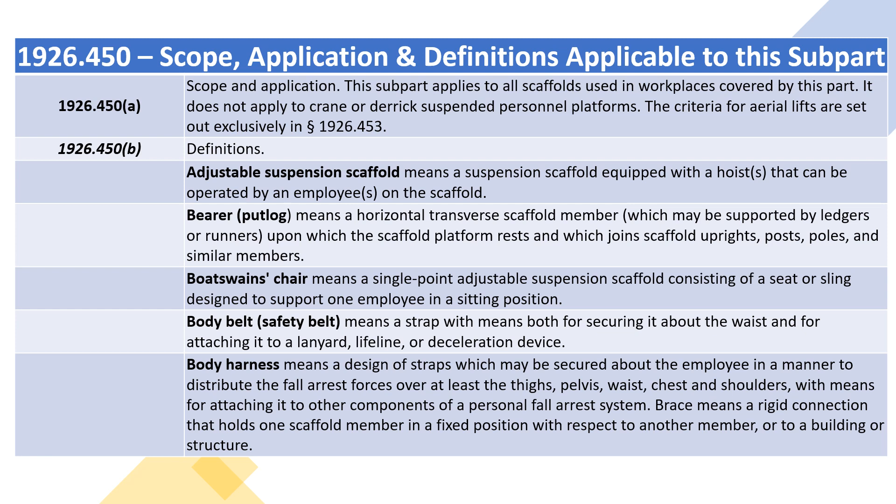Brace means a rigid connection that holds one scaffold member in a fixed position with respect to another member, or to a building or structure.

Bricklayer's square scaffold means a supported scaffold composed of framed squares which support a platform. Carpenter's bracket scaffold means a supported scaffold consisting of a platform supported by brackets attached to building or structural walls.

Catenary scaffold means a suspension scaffold consisting of a platform supported by two essentially horizontal and parallel ropes attached to structural members of a building or other structure. Additional support may be provided by vertical pickups.

Chimney hoist means a multi-point adjustable suspension scaffold used to provide access to work inside chimneys. See multi-point adjustable suspension scaffold.

Cleat means a structural block used at the end of a platform to prevent the platform from slipping off its supports. Cleats are also used to provide footing on sloped surfaces such as crawling boards.

Competent person means one who is capable of identifying existing and predictable hazards in the surroundings or working conditions which are unsanitary, hazardous, or dangerous to employees, and who has authorization to take prompt corrective measures to eliminate them.

Continuous run scaffold means a two-point or multi-point adjustable suspension scaffold constructed using a series of interconnected braced scaffold members or supporting structures erected to form a continuous scaffold.

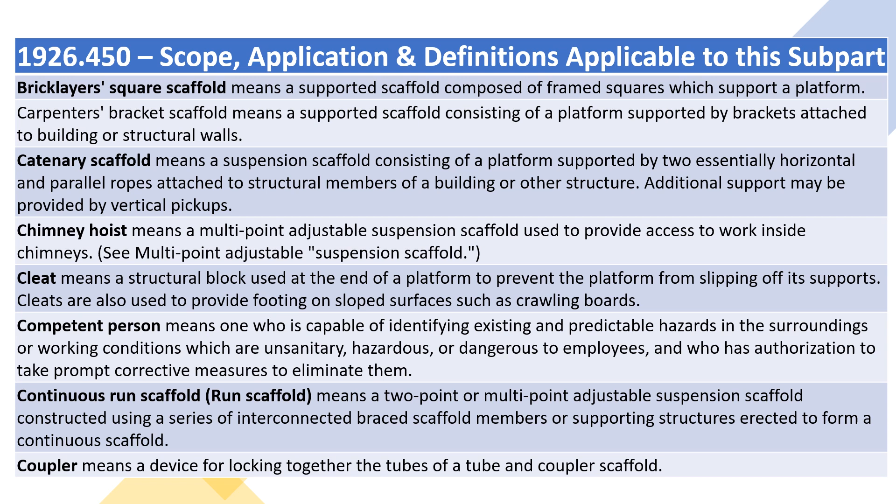Coupler means a device for locking together the tubes of a tube and coupler scaffold. Crawling board, or chicken ladder, means a supported scaffold consisting of a plank with cleats spaced and secured to provide footing, for use on sloped surfaces such as roofs.

Deceleration device means any mechanism, such as a rope grab, ripstitch lanyard, specially woven lanyard, tearing or deforming lanyard, or automatic self-retracting lifeline lanyard, which dissipates a substantial amount of energy during a fall arrest or limits the energy imposed on an employee during fall arrest.

Double pole, or independent pole, scaffold means a supported scaffold consisting of platforms resting on crossbeams, bearers, supported by ledgers and a double row of uprights independent of support, except ties, guys, braces, from any structure.

Equivalent means alternative designs, materials or methods to protect against a hazard which the employer can demonstrate will provide an equal or greater degree of safety for employees than the methods, materials or designs specified in the standard.

Exposed power lines means electrical power lines which are accessible to employees and which are not shielded from contact. Such lines do not include extension cords or power tool cords.

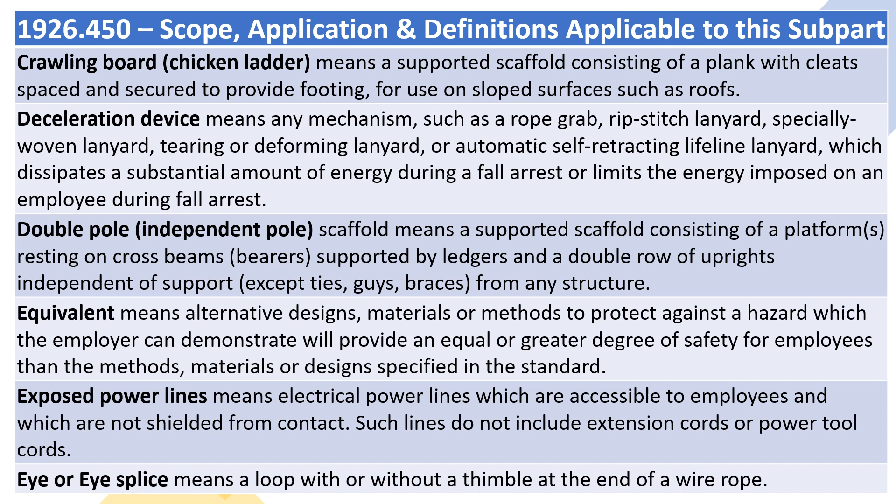Eye splice means a loop with or without a thimble at the end of a wire rope. Fabricated decking and planking means manufactured platforms made of wood, including laminated wood, and solid sawn wood planks, metal or other materials.

Fabricated frame scaffold, or tubular welded frame scaffold, means a scaffold consisting of a platform supported on fabricated end frames with integral posts, horizontal bearers, and intermediate members.

Failure means load refusal, breakage, or separation of component parts. Load refusal is the point where the ultimate strength is exceeded.

Float, or ship, scaffold means a suspension scaffold consisting of a braced platform resting on two parallel bearers and hung from overhead supports by ropes of fixed length.

Form scaffold means a supported scaffold consisting of a platform supported by brackets attached to formwork. Guardrail system means a vertical barrier consisting of, but not limited to, top rails, mid rails, and posts erected to prevent employees from falling off a scaffold platform or walkway to lower levels.

Hoist means a manual or power-operated mechanical device to raise or lower a suspended scaffold. Horse scaffold means a supported scaffold consisting of a platform supported by construction horses, saw horses. Horse scaffolds constructed of metal are sometimes known as trestle scaffolds.

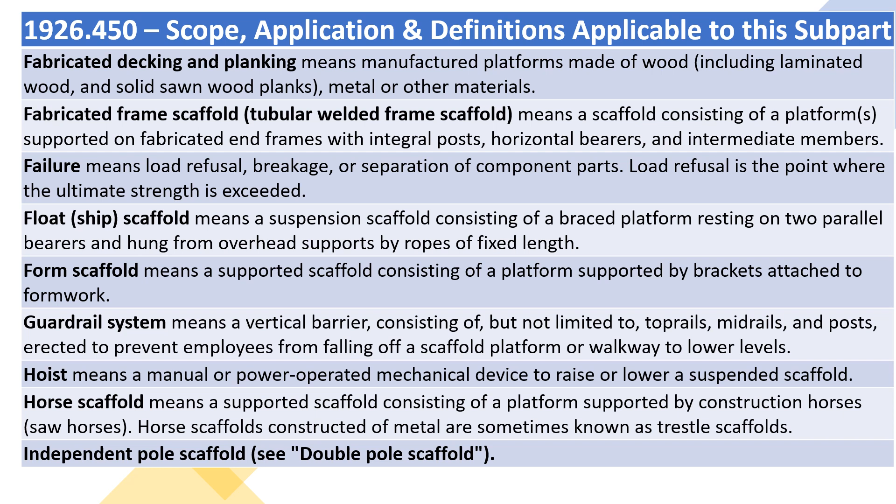Independent pole scaffold, see double pole scaffold. Interior hung scaffold means a suspension scaffold consisting of a platform suspended from the ceiling or roof structure by fixed length supports. Ladder jack scaffold means a supported scaffold consisting of a platform resting on brackets attached to ladders.

Ladder stand means a mobile, fixed-size, self-supporting ladder consisting of a wide flat tread ladder in the form of stairs. Landing means a platform at the end of a flight of stairs.

Large area scaffold means a pole scaffold, tube and coupler scaffold, systems scaffold, or fabricated frame scaffold erected over substantially the entire work area. For example, a scaffold erected over the entire floor area of a room.

Lean-to scaffold means a supported scaffold which is kept erect by tilting it toward and resting it against a building or structure. Lifeline means a component consisting of a flexible line that connects to an anchorage at one end to

hang vertically, vertical lifeline, or that connects to anchorages at both ends to stretch horizontally, horizontal lifeline, and which serves as a means for connecting other components of a personal fall arrest system to the anchorage.

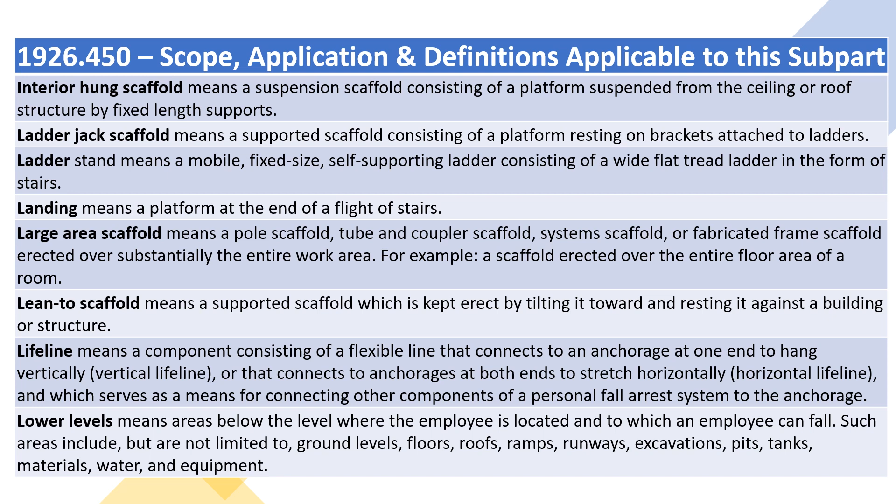Lower levels means areas below the level where the employee is located and to which an employee can fall. Such areas include, but are not limited to, ground levels, floors, roofs, ramps, runways, excavations, pits, tanks, materials, water, and equipment. Mason's adjustable supported scaffold, see self-contained adjustable scaffold.

Mason's multi-point adjustable suspension scaffold means a continuous run suspension scaffold designed and used for masonry operations. Maximum intended load means the total load of all persons, equipment, tools, materials, transmitted loads, and other loads reasonably anticipated to be applied to a scaffold or scaffold component at any one time.

Mobile scaffold means a powered or unpowered, portable, caster or wheel-mounted supported scaffold. Multi-level suspended scaffold means a two-point or multi-point adjustable suspension scaffold with a series of platforms at various levels resting

on common stirrups. Multi-point adjustable suspension scaffold means a suspension scaffold consisting of a platforms which is suspended by more than two ropes from overhead supports and equipped with means to raise and lower the platform to desired work levels. Such scaffolds include chimney hoists.

Needle beam scaffold means a platform suspended from needle beams. Open sides and ends means the edges of a platform that are more than 14 inches, 36 centimeters away horizontally from a sturdy, continuous, vertical surface, such as a building wall, or a sturdy, continuous horizontal surface, such as a floor, or a point of access.

Exception: for plastering and lathing operations, the horizontal threshold distance is 18 inches, 46 centimeters. Outrigger means the structural member of a supported scaffold used to increase the base width of a scaffold in order to provide support for and increased stability of the scaffold.

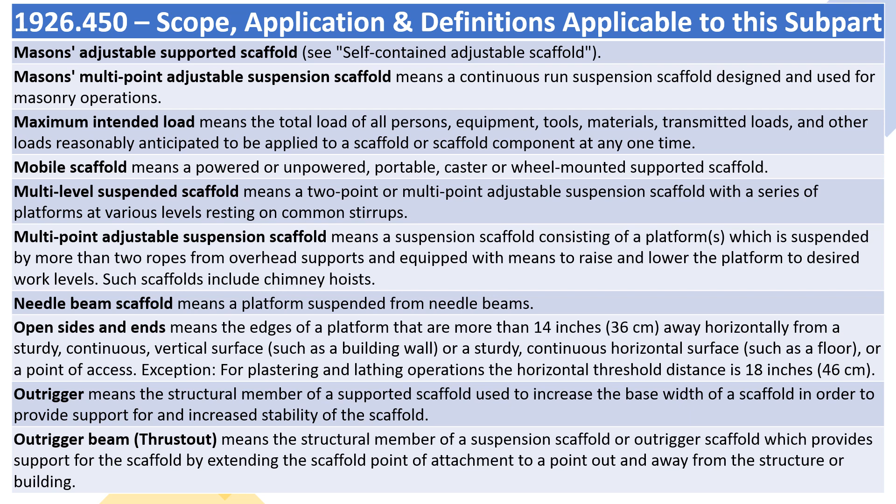Outrigger beam, thrust out, means the structural member of a suspension scaffold or outrigger scaffold which provides support for the scaffold by extending the scaffold point of attachment to a point out and away from the structure or building.

Outrigger scaffold means a supported scaffold consisting of a platform resting on outrigger beams, thrust-outs, projecting beyond the wall or face of the building or structure, the inboard ends of which are secured inside the building or structure.

Overhand bricklaying means the process of laying bricks and masonry units such that the surface of the wall to be jointed is on the opposite side of the wall from the mason, requiring the mason to lean over the wall to complete the work. It includes mason tending and electrical installation incorporated into the brick wall during the overhand bricklaying process.

Personal fall arrest system means a system used to arrest an employee's fall. It consists of an anchorage, connectors, a body belt or body harness and may include a lanyard, deceleration device, lifeline, or combinations of these. Platform means a work surface elevated above lower levels.

Platforms can be constructed using individual wood planks, fabricated decks, and fabricated platforms.

Pole scaffold: see definitions for single pole scaffold and double, independent, pole scaffold. Power-operated hoist means a hoist which is powered by other than human energy. Pump jack scaffold means a supported scaffold consisting of a platform supported by vertical poles and movable support brackets.

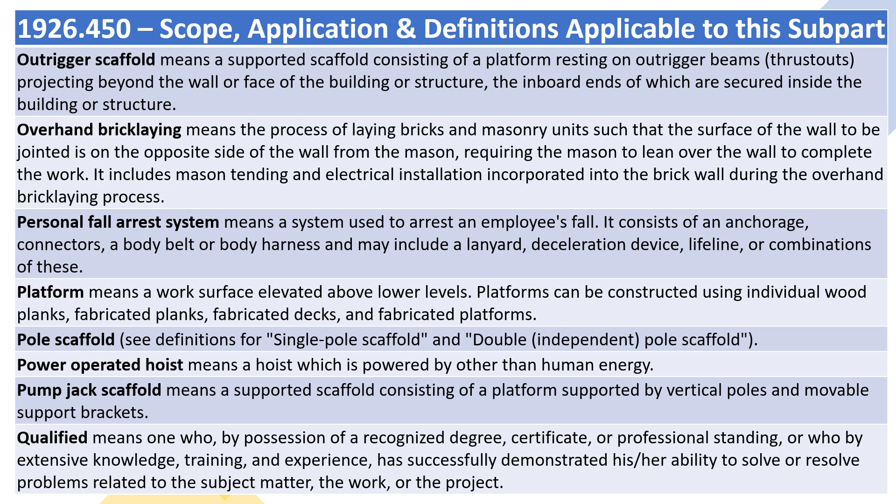Qualified means one who, by possession of a recognized degree, certificate, or professional standing, or who by extensive knowledge, training, and experience, has successfully demonstrated his or her ability to solve or resolve problems related to the subject matter, the work, or the project. Rated load means the manufacturer's specified maximum load to be lifted by a hoist or to be applied to a scaffold or scaffold component.

Repair bracket scaffold means a supported scaffold consisting of a platform supported by brackets which are secured in place around the circumference or perimeter of a chimney, stack, tank, or other supporting structure by one or more wire ropes placed around the supporting structure. Roof bracket scaffold means a rooftop supported scaffold consisting of a platform resting on angular-shaped supports.

Runner, ledger, or ribbon means the lengthwise horizontal spacing or bracing member which may support the bearers. Scaffold means any temporary elevated platform, supported or suspended, and its supporting structure, including points of anchorage, used for supporting employees or materials or both.

Self-contained adjustable scaffold means a combination supported and suspension scaffold consisting of an adjustable platform mounted on an independent supporting frame not a part of the object being worked on, and which is equipped with a means to permit the raising and lowering of the platforms. Such systems include rolling roof rigs, rolling outrigger systems, and some masons' adjustable supported scaffolds.

Shore scaffold means a supported scaffold which is placed against a building or structure and held in place with props. Single-point adjustable suspension scaffold means a suspension scaffold consisting of a platform suspended by one rope from an overhead support and equipped with means to permit the movement of the platform to desired work levels.

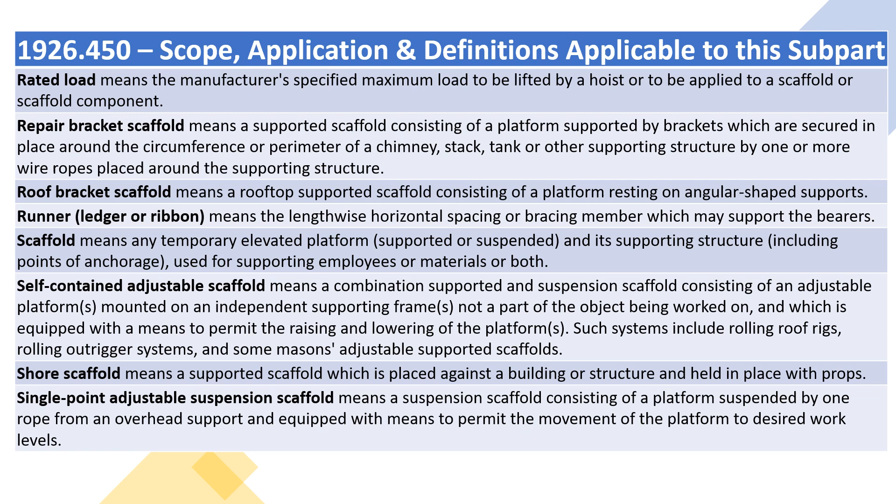Single-pole scaffold means a supported scaffold consisting of a platform resting on bearers, the outside ends of which are supported on runners secured to a single row of posts or uprights, and the inner ends of which are supported on or in a structure or building wall.

Stair tower, scaffold stairway/tower, means a tower comprised of scaffold components and which contains internal stairway units and rest platforms. These towers are used to provide access to scaffold platforms and other elevated points such as floors and roofs. Stall load means the load at which the prime mover of a power-operated hoist stalls or the power to the prime mover is automatically disconnected.

Step, platform, and trestle ladder scaffold means a platform resting directly on the rungs of step ladders or trestle ladders. Stilts means a pair of poles or similar supports with raised footrests, used to permit walking above the ground or working surface. Stonesetter's multi-point adjustable suspension scaffold means a continuous run suspension scaffold designed and used for stonesetter's operations.

Supported scaffold means one or more platforms supported by outrigger beams, brackets, poles, legs, uprights, posts, frames, or similar rigid support. Suspension scaffold means one or more platforms suspended by ropes or other non-rigid means from an overhead structure.

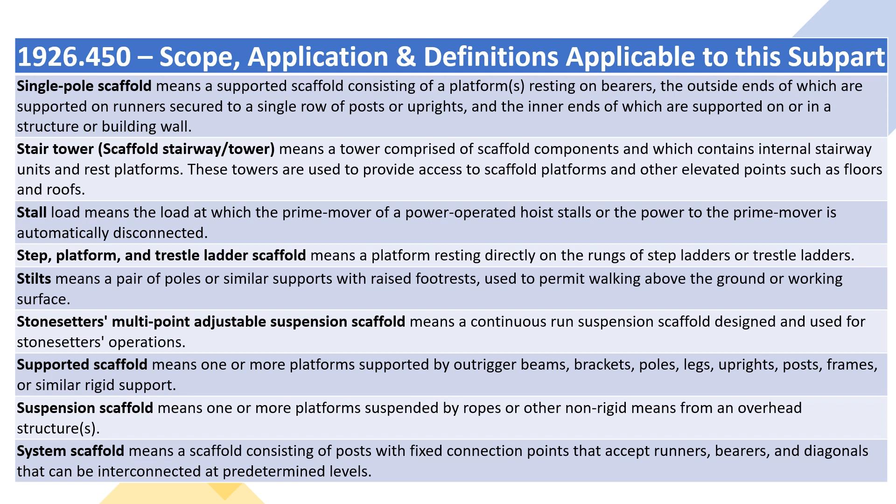System scaffold means a scaffold consisting of posts with fixed connection points that accept runners, bearers, and diagonals that can be interconnected at predetermined levels.

Tank builder's scaffold means a supported scaffold consisting of a platform resting on brackets that are either directly attached to a cylindrical tank or attached to devices that are attached to such a tank.

Top plate bracket scaffold means a scaffold supported by brackets that hook over or are attached to the top of a wall. This type of scaffold is similar to carpenter's bracket scaffolds and form scaffolds and is used in residential construction for setting trusses. Tube and coupler scaffold means a supported or suspended scaffold consisting of a platform supported by tubing, erected with coupling devices connecting uprights, braces, bearers, and runners.

Tubular welded frame scaffold: see fabricated frame scaffold. Two-point suspension scaffold, swing stage, means a suspension scaffold consisting of a platform supported by hangers, stirrups, suspended by two ropes from overhead supports and equipped with means to permit the raising and lowering of the platform to desired work levels. Unstable objects means items whose strength, configuration, or lack of stability may allow them to become dislocated and shift and therefore may not properly support the loads imposed on them.

Unstable objects do not constitute a safe base support for scaffolds, platforms, or employees. Examples include but are not limited to barrels, boxes, loose brick, and concrete blocks.

Vertical pickup means a rope used to support the horizontal rope in catenary scaffolds. Walkway means a portion of a scaffold platform used only for access and not as a work level. Window jack scaffold means a platform resting on a bracket or jack which projects through a window opening.